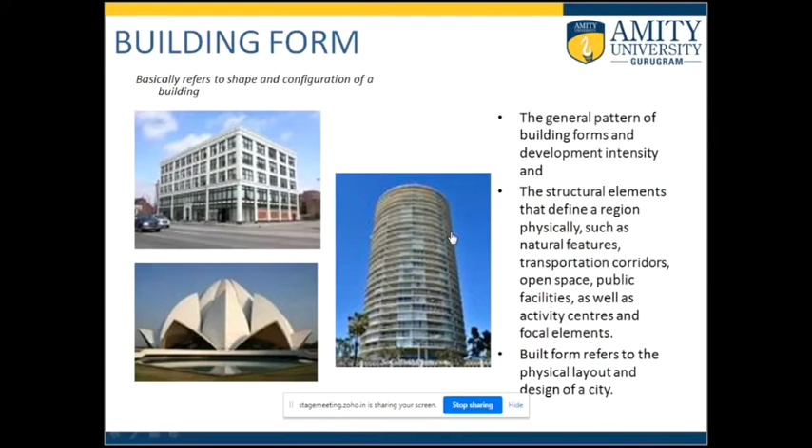Architecture is also a language. It gives a statement, right? You will understand it because every building you've seen - regular buildings, circular buildings, squarish buildings, buildings with different shapes - they all have a reason, a statement, a language. That's why we also say architecture is a language.

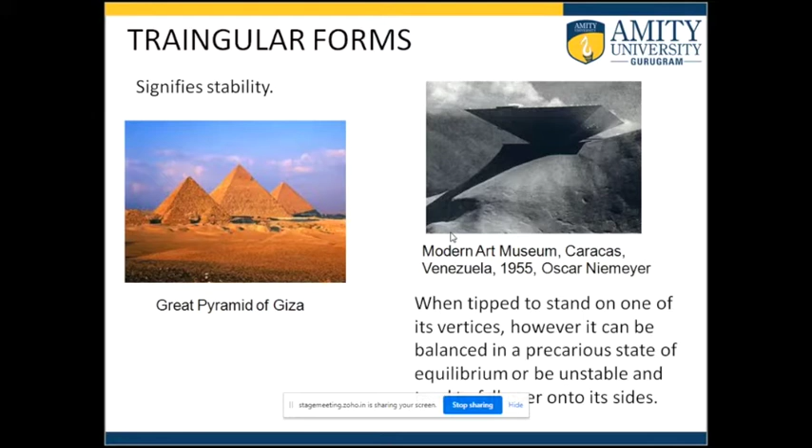Circular forms are always pointing towards the center, the center is the most important thing, and hence they are mostly known as stable forms. They can also be visualized as non-stable if the orientation is changed. Triangular forms like pyramids are known to be the most stable forms, but if you change the angle when they are tipped to stand on one of its vertices, like Oscar Niemeyer has done in one of his museums, it looks very dynamic.

Square forms are generally very pure, very rational. There is no preferred direction, so certain kinds of buildings prefer square forms. There are regular forms which are generally symmetrical - they could be very unique buildings, but still symmetrical and regular. Whereas there could be other buildings which are very exciting because they are not symmetrical.

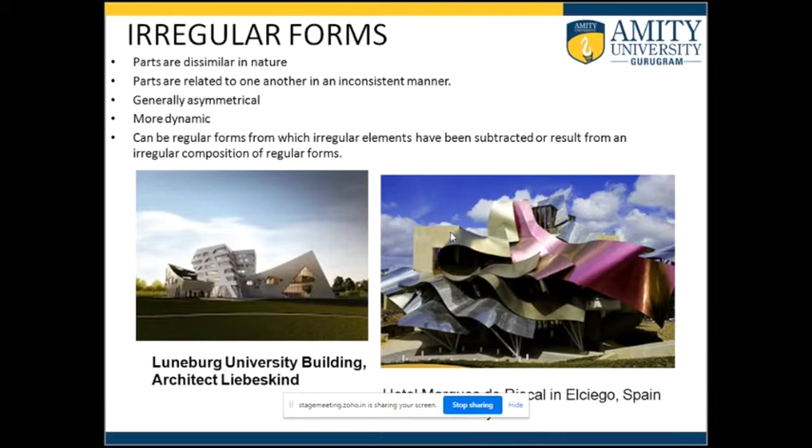They have different materials - there is absolutely no symmetry, no discipline, and that is the statement which these kinds of buildings want to make. So maybe it is not just one form; it could be addition of different forms, or subtraction of different forms. That is how we make a statement.

We give a symbolic meaning to the building. It may not be a very unique building, it could be a regular building, but still every building has some meaning to convey, some message to give. These are some important buildings like the pyramids - they are the symbol of power of the kings of Egypt. The Parthenon of Greece is a symbol of ancient Greece and democracy. The Taj Mahal is a symbol of beauty and enduring love.

The Empire State Building is the symbol of achievement and strength. Similarly, the Sydney Opera House is a symbol of late modern architecture, or it symbolizes modern Australia. In modern day symbolism, all the buildings we see around us, the skyscrapers, represent financial success and leadership - the moment we see a tall skyscraper, we know it symbolizes financial success. Domes, if on a public or government building, represent power. Irregular forms represent dynamism, motion, informality. Glass walls represent modernism and transparency.

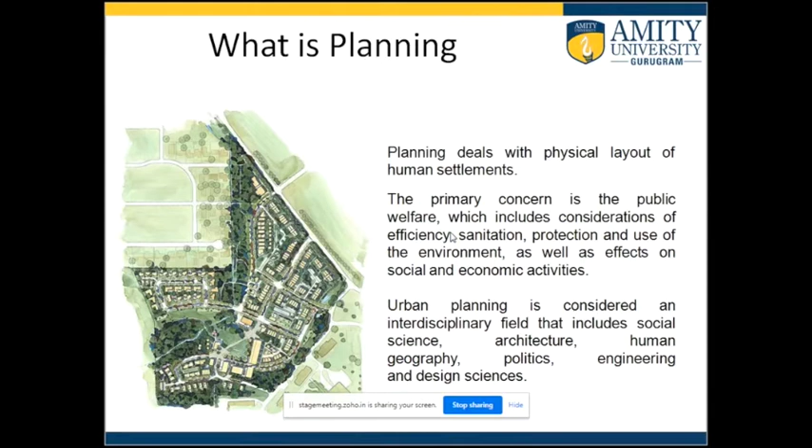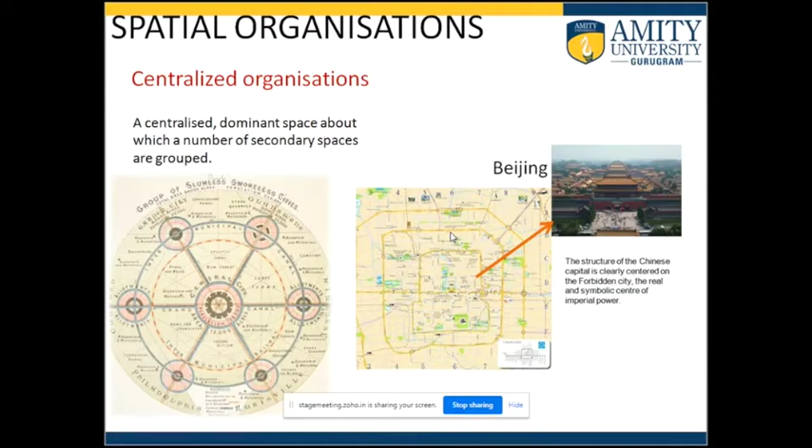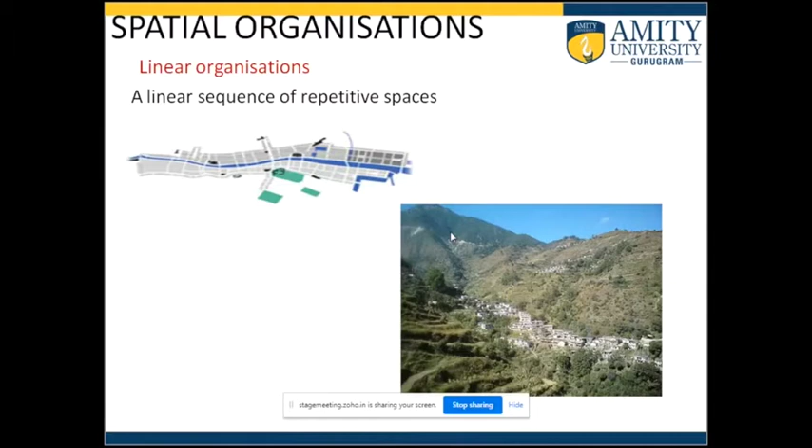There are different types of spatial organizations. If you've visited different cities, many times it's a centralized city, where there is one most powerful, most important monument in the center and everything else is arranged around it. Otherwise, other settlements are linear—there is a main road, or maybe a natural feature or a river, that goes linearly from a city, and all the other settlements are planned in a linear fashion along that feature.

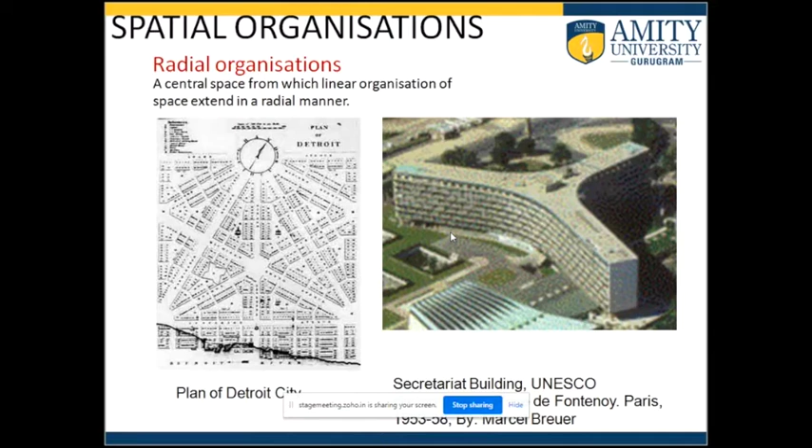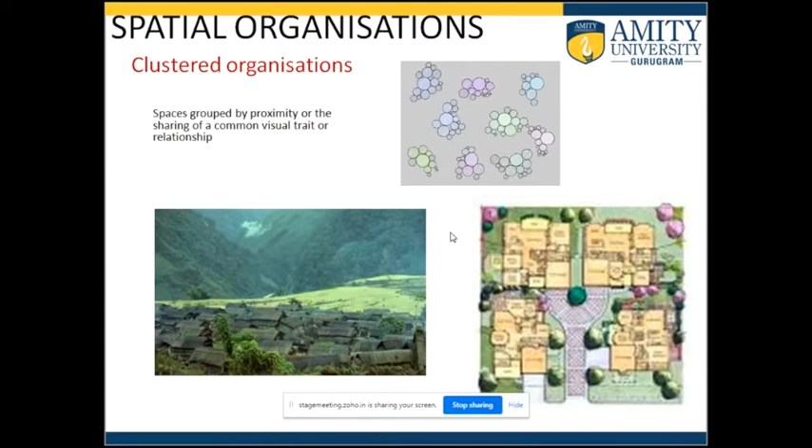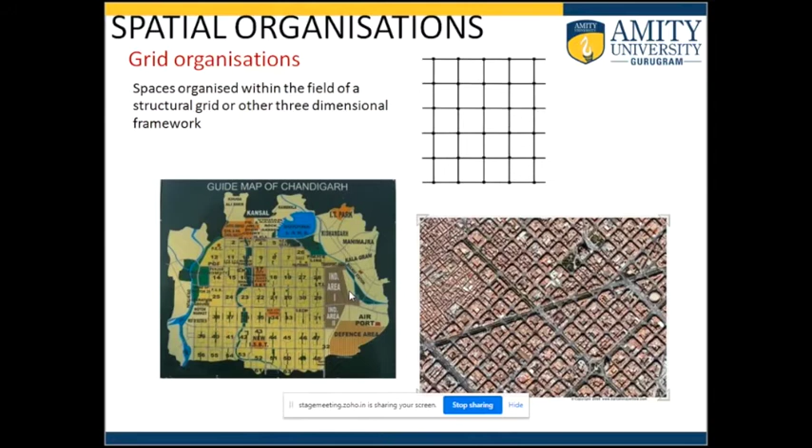So there are different styles in which settlements are planned. Or even if they are not planned, even if they are organic, there is still a certain reason, a certain logic to the settlement.

Built environment is when architecture and planning come together—everything else around us which is built is called built environment. Architecture and planning are all under the umbrella of built environment. All the buildings, the roads, the culverts, the water drains, bridges, roads, everything else is built environment, and planners are responsible for creating that built environment for us.

Built environment, including architecture and planning, has different dimensions which are all interlinked. These will be the main areas of education when you enter an architecture or planning school: social and psychological. Why is psychology important? Because we will always be designing buildings for people who would be using it. We have to know how they think, how they react to the building, because the building you are staying in continuously affects you, so you have to know the psychology of that person.

Then social—when you are designing a township or a neighborhood, you have to know about the whole society which is going to use it. Cultural—you have to know what kind of festivals are celebrated, how people interact with each other, what are the cultural norms, the traditions, everything, so that you design a fully functional settlement for them.

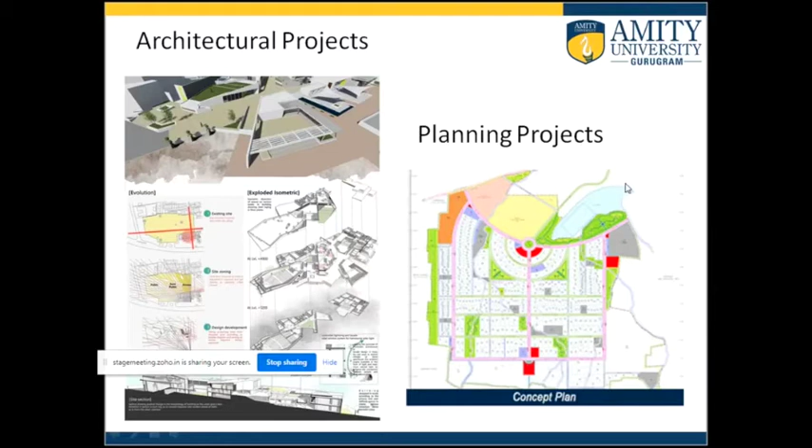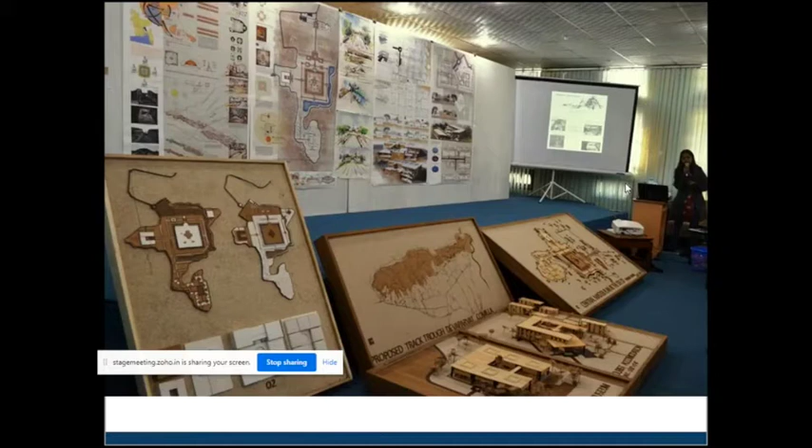So these are the pictures of some of the architectural projects which students produce. These are the images of some of the planning projects which happen on a bigger area at a city level or a neighborhood level. So when you make all these plans, you make the drawings, you make the models, you make a presentation, then you have to give the presentation to a set of jury members who are experts in these fields, and your classmates and your juniors, everybody.

And then they actually give you crits. They discuss your design, they tell you what should have been done or not. And after the discussion, you get your grades.

So, what are the career prospects? Coming to the next section of this presentation, what are the career prospects in this field, in the field of architecture? An architect is a person who plans, designs, and oversees the construction of buildings. So we know that in the architecture school we will be trained to plan and design the building, and see how it is constructed on site.

So you can be your own boss, right? You can start your own practice straight away after 5 years of course. It's a long course, a 5 year course with one full semester of practical training, wherein you have to actually go to some office and work there for almost 6 to 8 months. After that you are trained enough to start your own practice, and you earn really well once you start getting your projects. So it's a very fruitful profession that way.

But if you, for some reason, want to develop some expertise in the field, there are different career options which you can choose from. The first one, which is very popular, is interior designer. There is a master's course in interior designing, but even if you don't want to go and do the masters, you can straight away start designing the interiors of buildings.